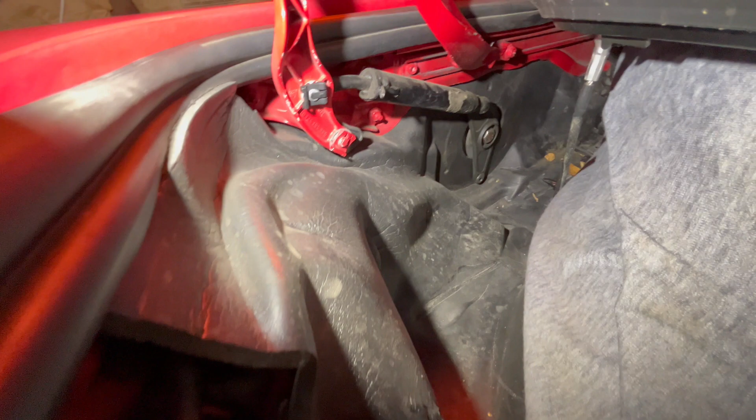Okay, so we got it up. Top's up, got this part up. Switch is cool. So now we can take a peek and look inside what's in here. So we have the motor. That one arm was taken off. That's connected to the convertible top. So we'll have to put that back on. We actually found that little ball pin, you know. Here, I'll show you over on this side. That one down there. Oh boy. Right there. So what this little shock hooks onto, there's one missing on the left side that connects to the convertible top. We found that down in there.

So I think what we're gonna have to do is drop the top again and put that back on. But if you notice, these arms are in different positions and this side's all beat up. So what I found is that this is actually extremely loose. So there's some damage up here. So I think this got loose somehow. Started binding, stuff popped off, and it kind of all just added up and ended up like this.

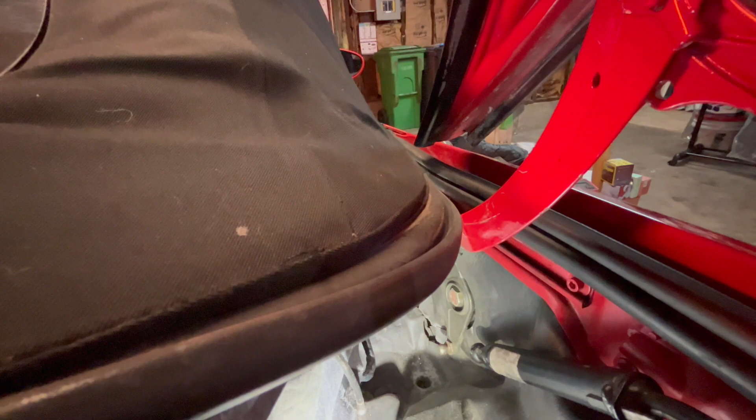Someone has been here before because there's some new pins right there and that black one right there. So I don't know if it was who previously worked on this or what happened, but we're gonna take this part back, see if the actual mounting bolts or nuts are loose, and then retighten them all down to the torque spec and try to make it all work. So yeah, whoo, glad we found something.

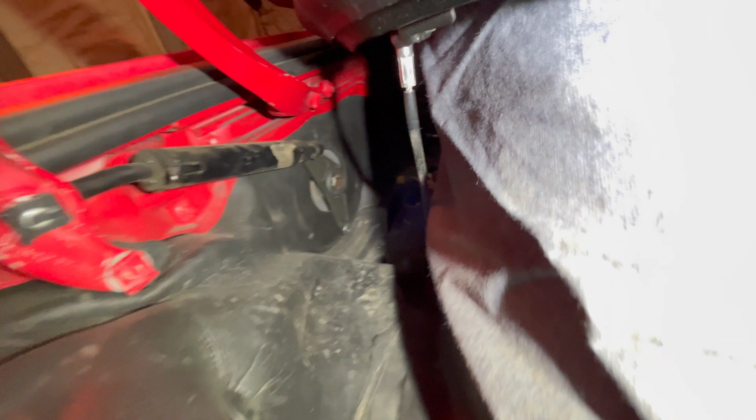Okay, so I started taking this side off. So I took that arm, this little shock thing off. Basically what's on there still. That center bolt is a 19 millimeter, so super easy. It was like finger tight. Actually, I think both of them are finger tight. So that's definitely an issue. Doesn't look like there's any body damage on this side, so that's good. So I wonder why this side was all messed up. So we're gonna start peeling off some of this dust covering stuff to get to that motor, and then go from there, tighten that down, see if anything else is busted.

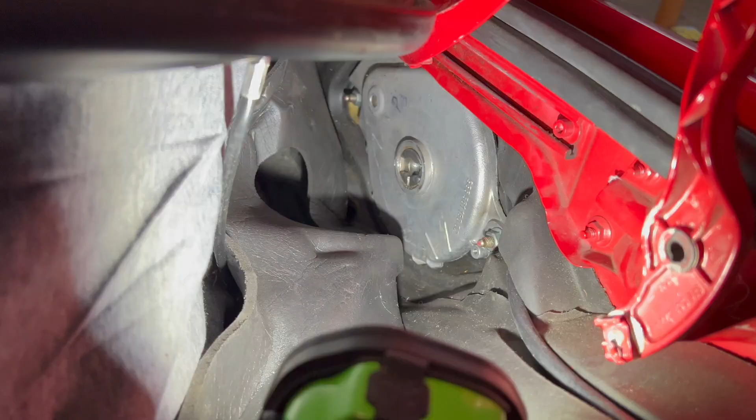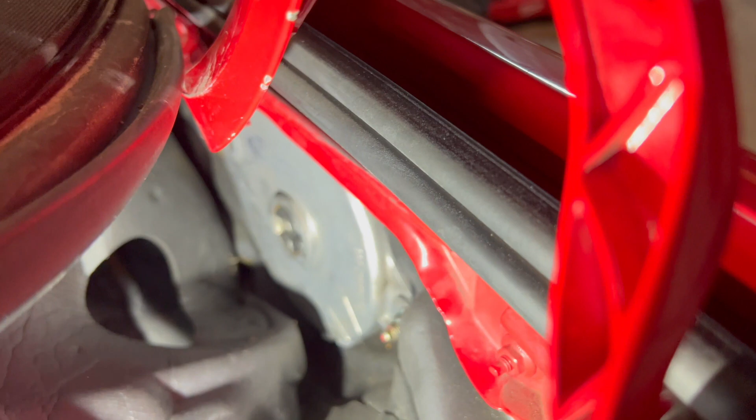Okay, so we pulled it back. There was this dust cover on it. I mean, it's just super simple. We also found this little clip in there. Oop, lost the flashlight. So that was interesting. But alright, let's get back in here. So it looks like there's just two mounting nuts. So see this one. So that's not loose, so that's good.

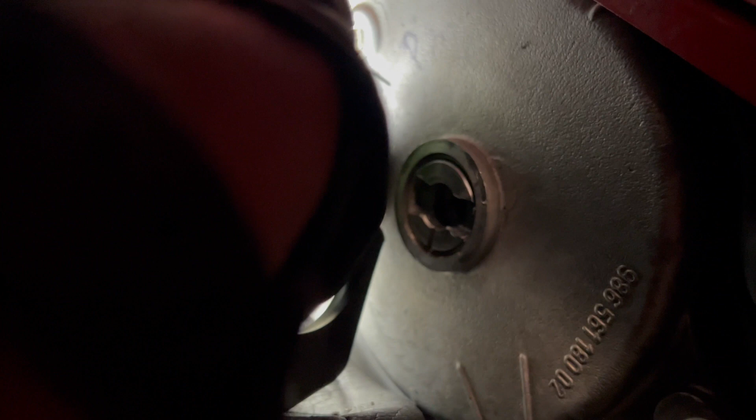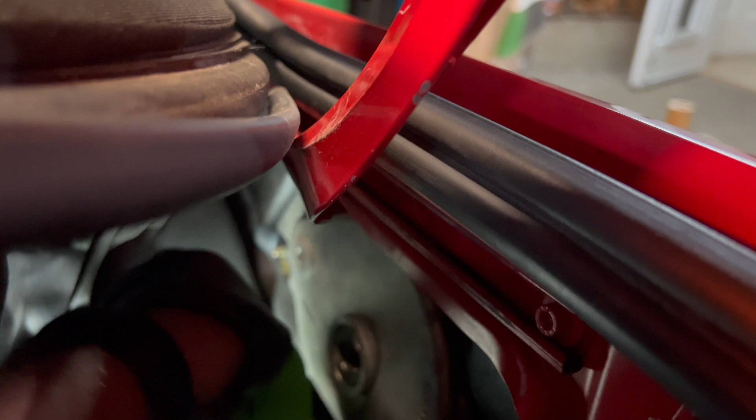Some light. See what's going on. Blinded by the light. Oh gosh. Oh my Jesus. This is so much harder than I thought it would be, just lighting wise. Okay, there. Whoa. Well, that for sure could have caused something. Wow. Well, yeah. I hope that was it. I'll look up the torque specs on these. Put those in and tighten them down, and then do the exact same thing on the other side.

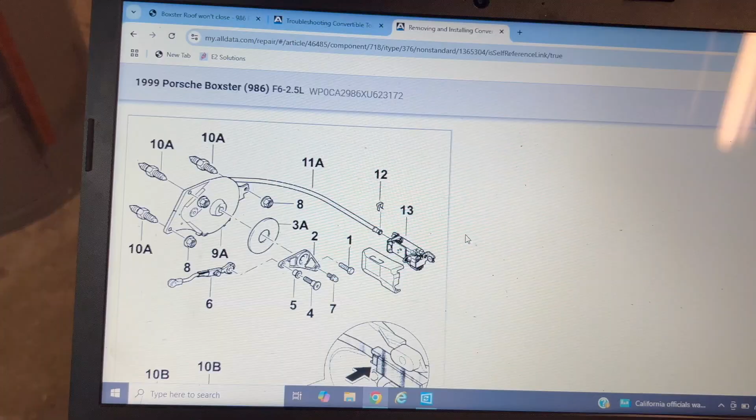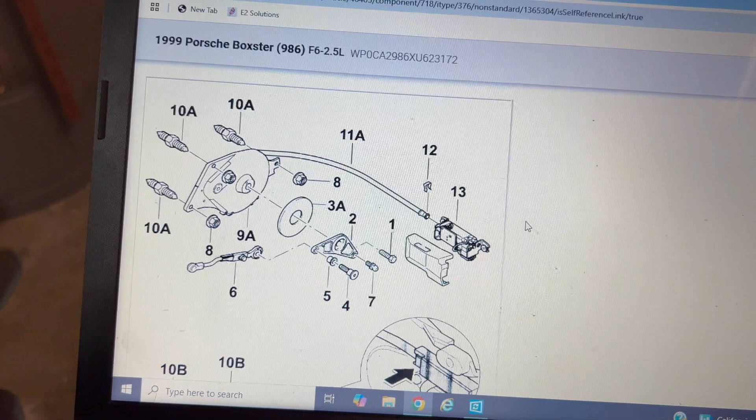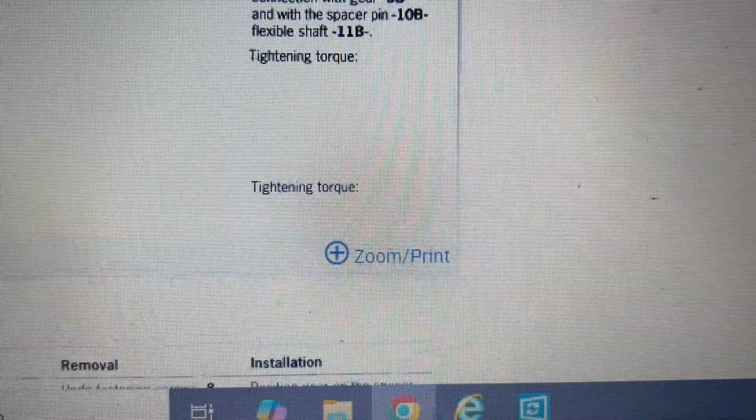Okay, so here we are back at ALLDATA. So these number 8s, that's what we're looking for. I guess there's 3 of them. I only saw 2, but let's just try to look harder. So scroll down, should get a torque spec somewhere. Here we go, number 1, 2, 3, 8. Collar nut, 3 of them. Okay, so there is another one. Tightening torque. Whoa, you know what that says right there once I get this in focus? Oh, good old Guten tight. Classic Germans.

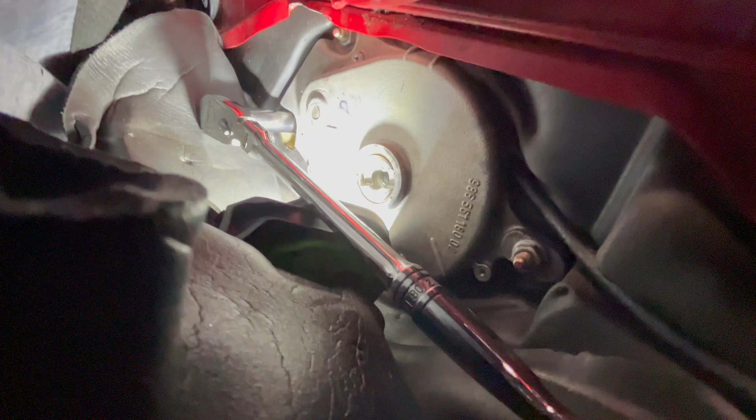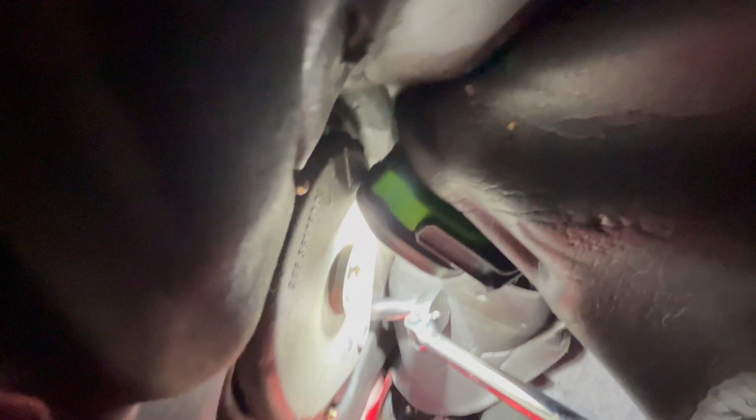Okay, so we're on there. These are 13 millimeters. So this is like the worst angle to probably give me filming this from. But I turned it upside down. Whee! Oh, look at that.

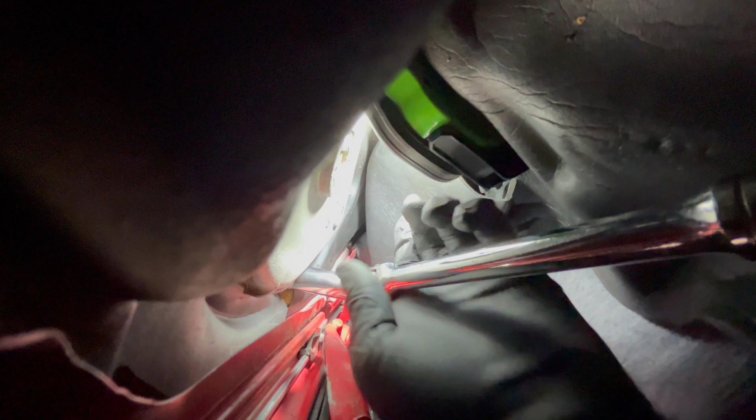So, just gonna keep tightening it to get to a nice good, you know, they go, oh, good and tight, right there. Perfect, that's one. So the third one is up here hiding. Let's see how loose this one is. Oh man, that one's crazy loose too. All right, let's keep it going. That's probably the issue, is that these weren't tightened properly.

You know, must have not been a German doing this.

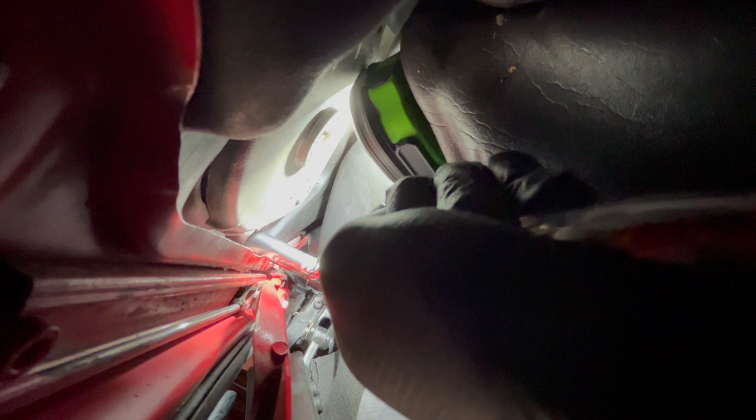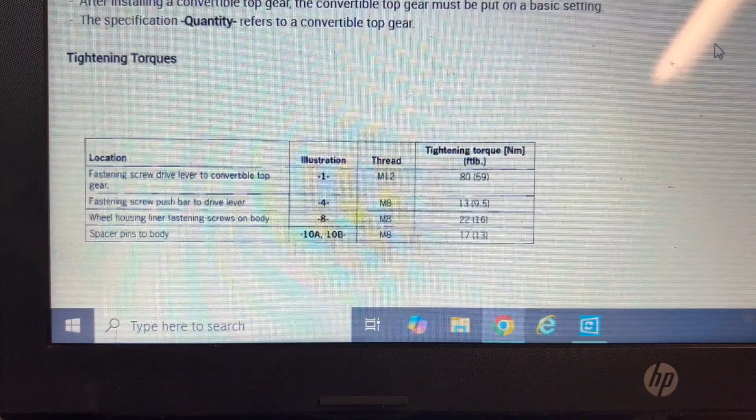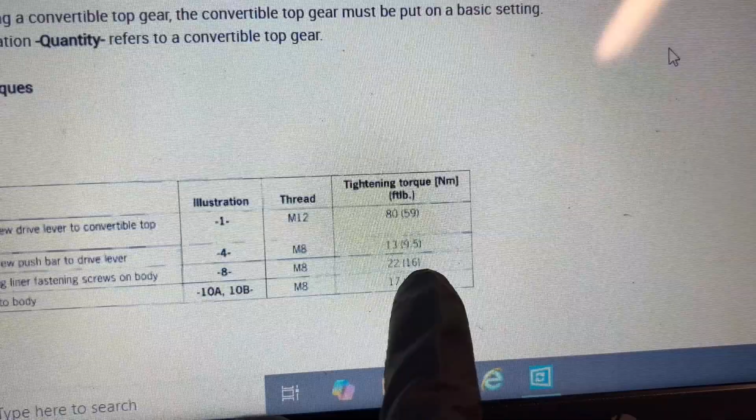All right, oh, let's do one more. Good. Whew. That was scary. Well, wouldn't you know, if I scrolled all the way down the page, it actually has the tightening torque. So number 8 is where we were. 22 Newton meters, or 16 foot-pounds. That makes way more sense. Yeah, that was definitely, I would say, a little bit more than 16 foot-pounds.

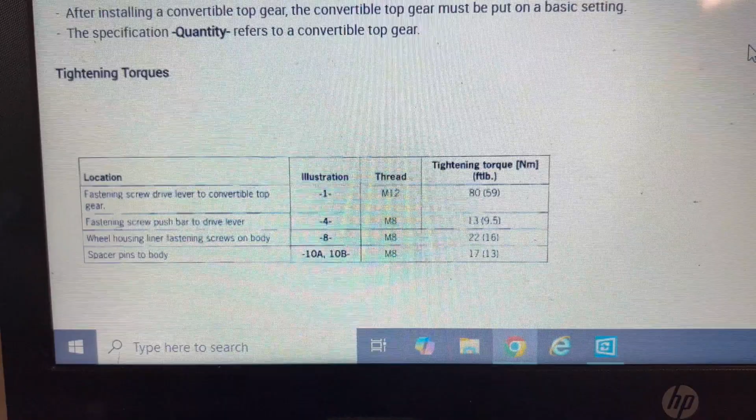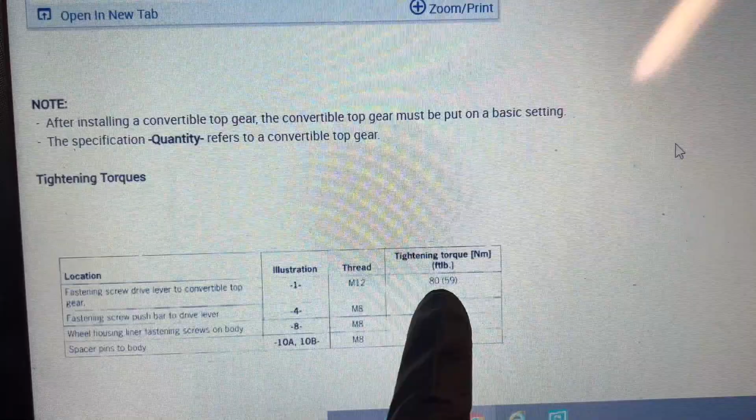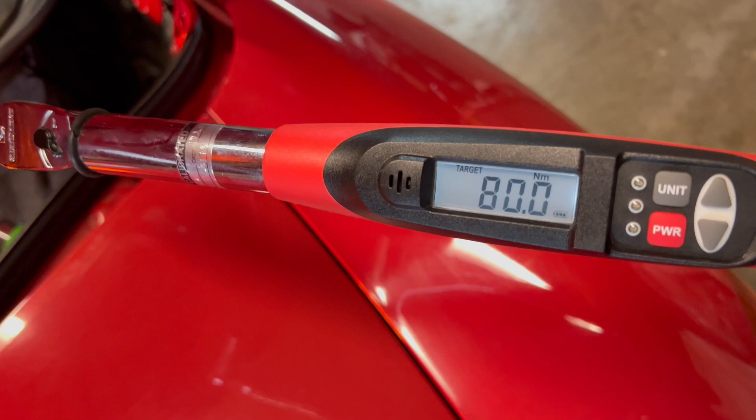So I think those are good, but that main screw, the number 1 fastening screw, it's gonna be 59 foot-pounds or 80 Newton meters. So I think that one's slightly more important. So we can just do that one together. All right, we have it set to 80 Newton meters. Gotta go in here. All right, we're on it.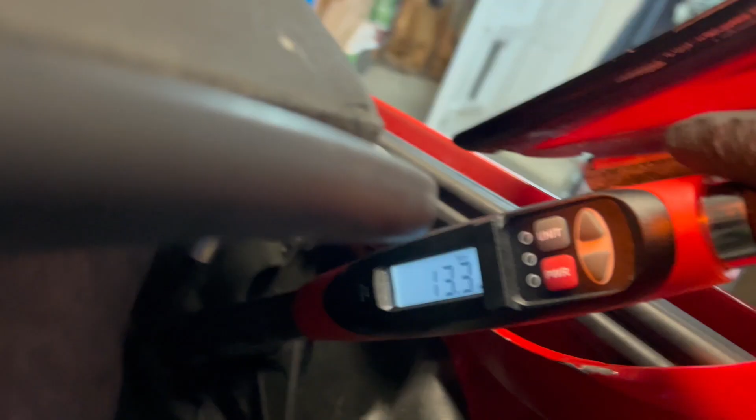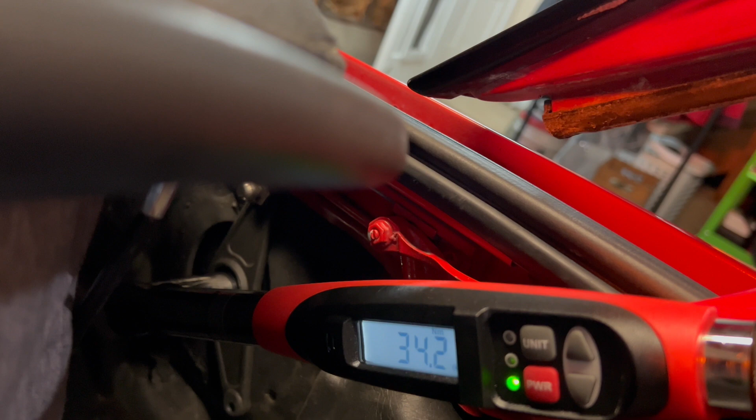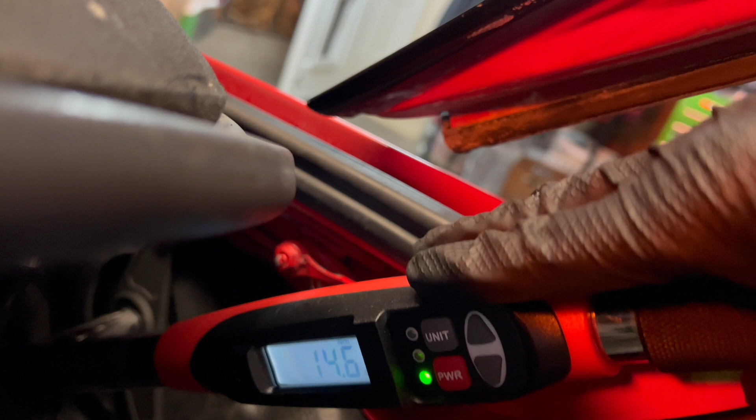Let's see. Whoa, what? Oh, okay, no, never mind. You can see the point in there. All right, still going down. Ooh, almost halfway there. All right, this better be the last pull. Let's go. Oh, all right. Well, they yelled at me, so I'm gonna stop. It'd be nice if these had a flexible head on it, but no, I don't got money for one of those.

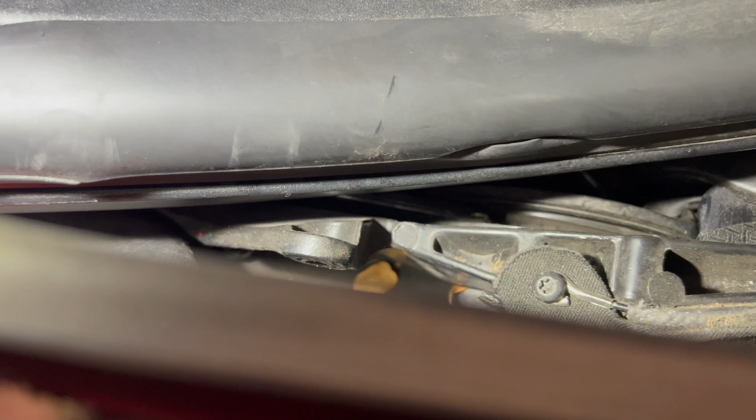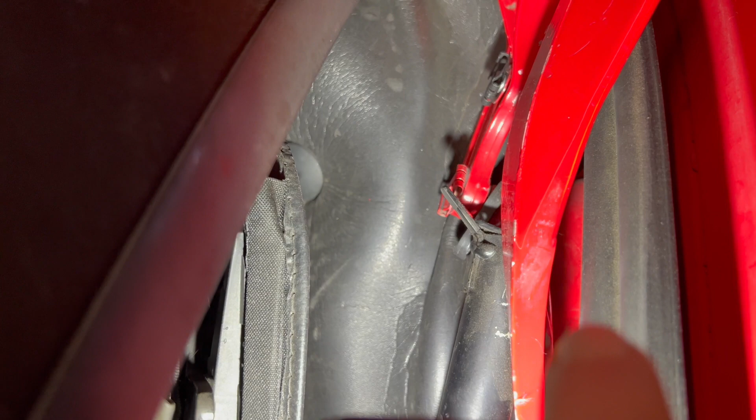All right, so right here is where that ball joint, it's not a ball joint, but that little ball pivot thing goes. The other one goes in right here. This side is actually missing the nut that holds it on. So I'm gonna go dig around and see if I could find it more in here. If not, I'll have to get a new one. But something else that I did notice is that on this little shock thing, I guess it's some sort of alignment pin or whatever you would want to call it. Anyway, the alignment bit on this is bent. The other one fits right in. There's like a hole right there. So I'll try to get this back up and straighten that out so it fits.

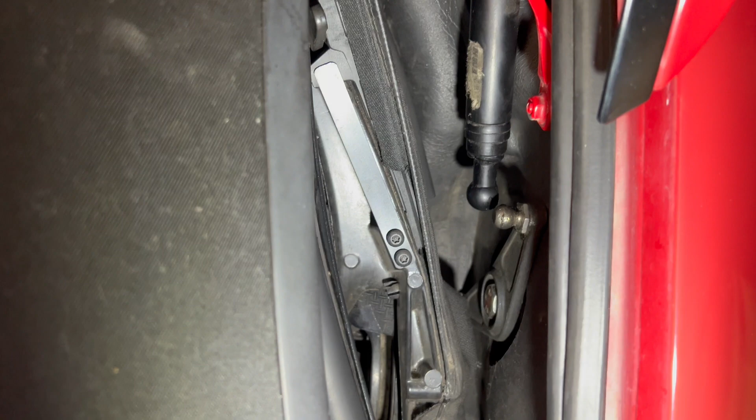And then also, what's going to be the main difficult part is that the motors are right now in two different positions. So you can see this one right here. I guess if I go straight up from it, it's not that far away from that bit right there. Walk all the way around. Oh, it's so red and shiny. And then here, you can see it's way off. So I'm thinking maybe unplugging one of the motors and then turning it on and trying to measure the distance from there. Because I mean, I don't know, that's the only thing I could think of doing right now. That would make sense. So, yeah.

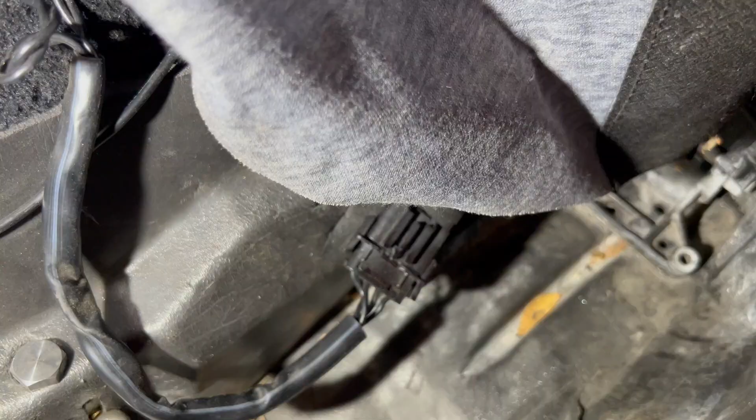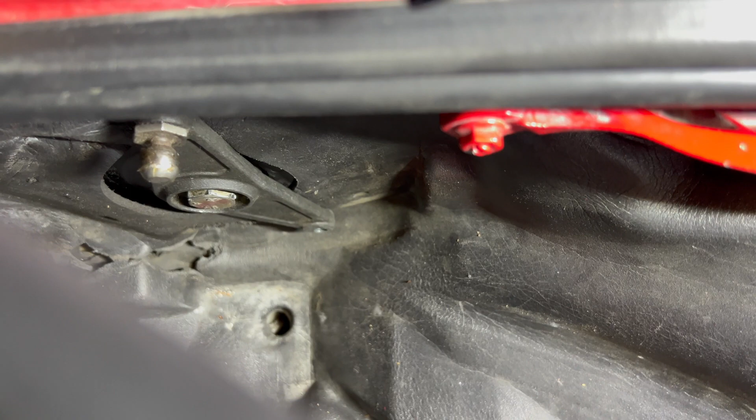Here we go. Okay, well, I'm hoping that's the switch. So I'll just unplug this and see what happens when I turn the motor back on. If it moves, I know that's not it, and I'll just plug it back in, but I'm guessing that's going to be it. Okay, so we're just going to measure these two out. Handy dandy tape measure. So I'll go from, oh, this is so fucking hard with one hand.

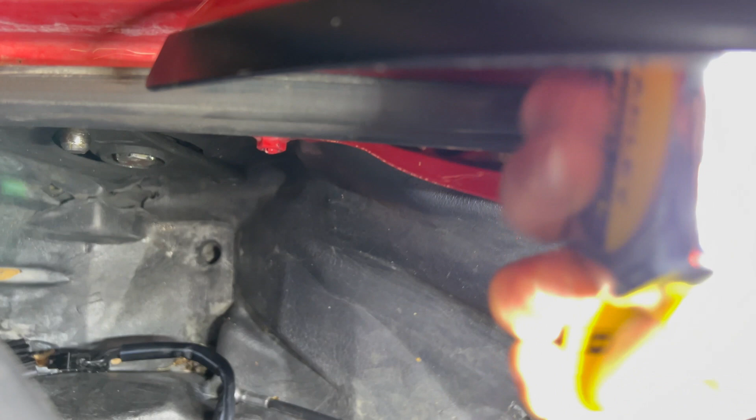There we go. Okay, so the end of the ball, the end of there is what, 4 3/4, pretty much exactly, more or less. Well, all right, here, let's put it directly on there. Well, okay, not 4 3/4, but 4 and whatever that number is. 1, 2, 3, 4, 5. 5/8. Okay. I got stuck. All right, so now we go to the other one. Oh man.

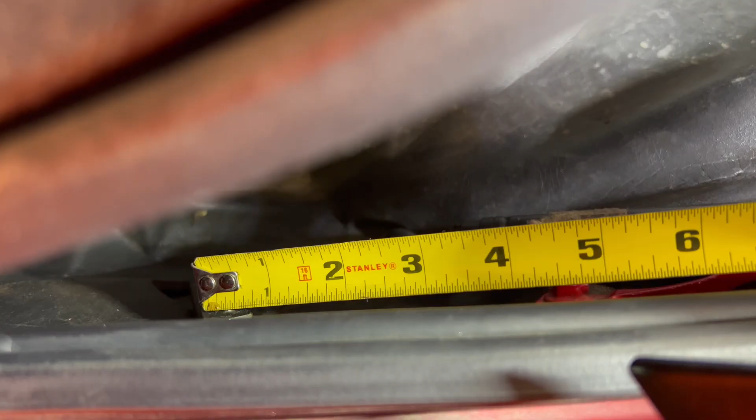Set this back up. Should be somewhere about 4 5/8. So, whoa, we're way off. Okay, so we gotta come back on this one a little bit. So, not too bad. A little closer, that's almost about 4 3/4, so a tad bit more. All right, a little bit too far, but we're so close. Woohoo! I think that's it. 4 5/8. Hell yeah. All right, so now let's hook these two back up. Hopefully that'll work.

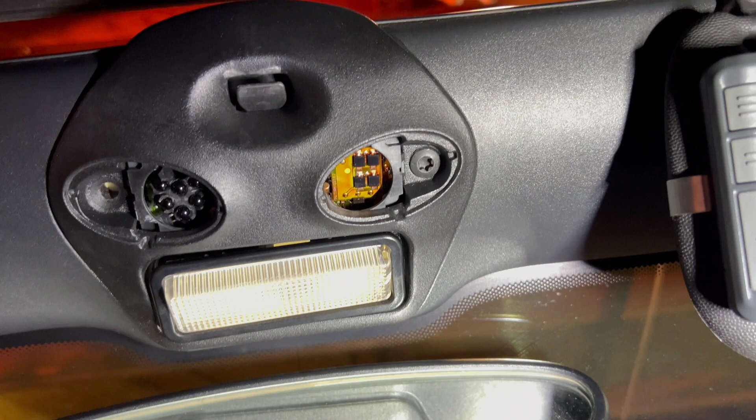I don't think the top's gonna work now because we still need to find that one nut for that little ball joint piece. But other than that, we should have everything else hooked up and ready to go. So that's exciting. Okay, so remember when I said that this piece up here was loose? So it actually turns out that somebody didn't put this screw back in on the other side, and that's why it was twisting. So we'll just take that one out, get the right thread pitch, try to find another thing similar to put in there.

I mean, we could buy one, but if I could find another, like even an Allen key one instead of this Torx bit, might be easier. But it also looks like this sensor up here, there was supposed to be another one on that side and it's just not there. But I'll take this down and then see what's going on up in there.

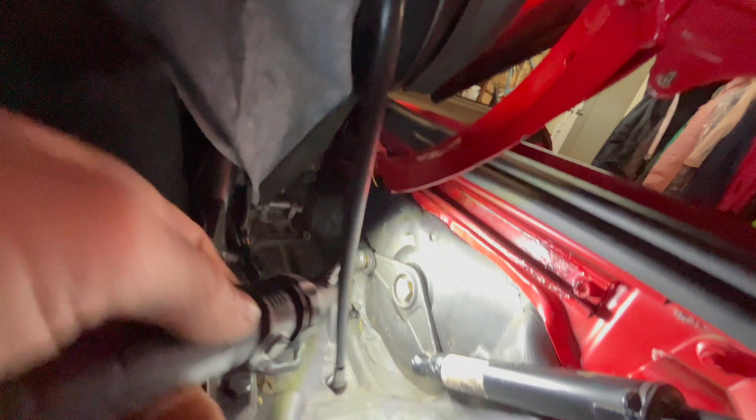All right, well, I got a little carried away and did some work without recording, but nothing too crazy that I can't really explain, you know, visually or whatever. So found that little ball joint piece by the other side, and basically the next step was just to hook up this arm. All right, let's see if we can get it.

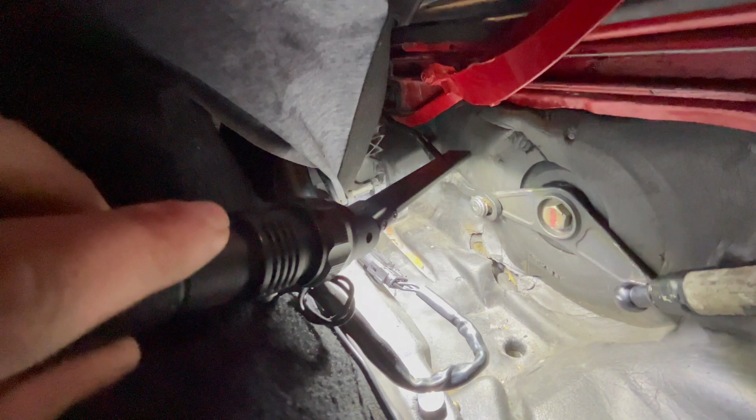Oh god, oh Jesus. So this little arm right here that I'm trying to illuminate with my flashlight, basically make sure that the motors are in the exact same position, and then slide this out. So this is like an adjustment arm for the top. So measure it out and adjust it. You want both sides to be pretty much the same length, or at least they should be around the same length. So here's the other one right there.

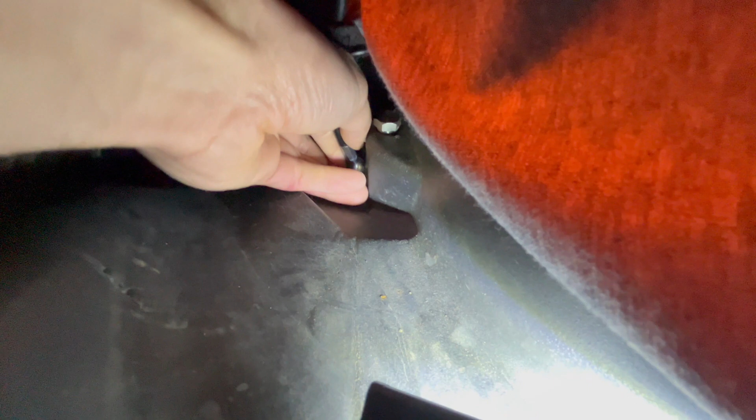Yeah, so we got that all hooked up and everything's connected, except for these little pins right here. So let's see if I can, oh man, why would I do that to myself? Slide this back down. Lift this little ball up. There we go. It's kind of hard. Oh man. There we go. One side.

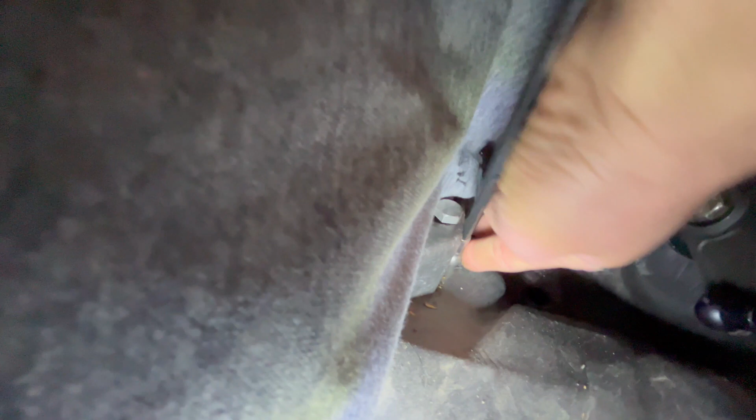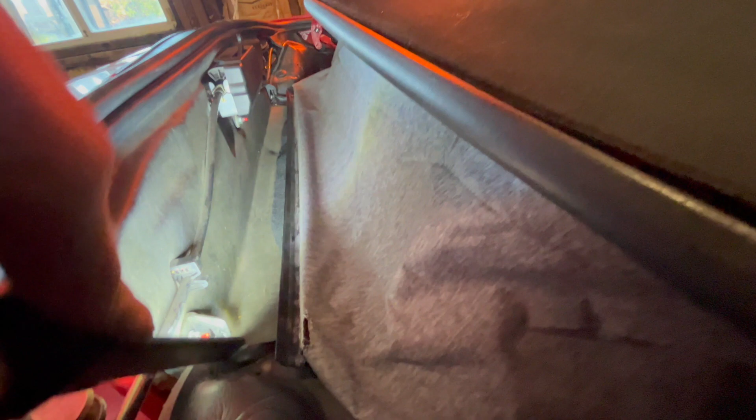Now, this side here. Let's try to tuck that up. Can't see it. Tucked up. Oh. Okay. So this should be here and here. Popped. And now this back piece is just that little plastic groove right here. Kind of clips up under, I forgot where it clipped up under. Oh, there's one little clip here, and one down all the way on the other side.

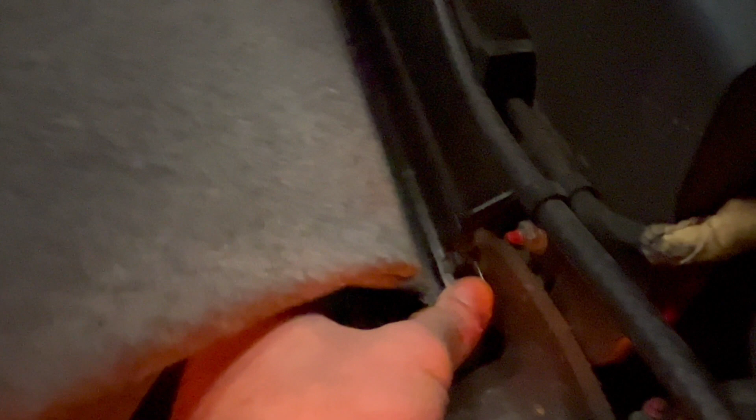So, see if I can show it with one hand. It kind of slides up like that. There. See if I can zoom in. Oh, look at that, just like that. And that's it for that piece. So now, remove my flashlight from in here.

Woo. Come back in here. Find the two buttons again. Up, down. Let's go down. Whoa, look at that. And it stops. So now, try going back the other way up. Oh yeah, look at that. Woo! Oh, why did it stop? Well, that's not good. It's supposed to go all the way. All right, well, at least it's there. Let's try to figure out why it didn't go all the way down now.

All right, so we got it up. I just had to cycle it a few times, but yeah, it worked. So now we're gonna try basically from the beginning. So, okay, keys out, on. We're not gonna turn the car on because we're in the garage. I think it should work. So we should just be able to press this, pull this back like there. So I'm gonna take the top down. Press the top down button. It's moving. That's coming up. Oh, it's going down.